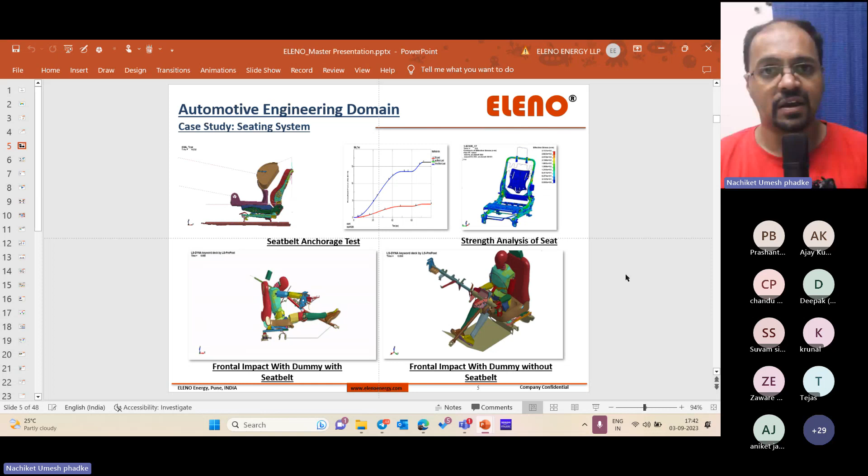So we will try and understand various applications of CAE and LS-DYNA. This is a seating system application, which is an extremely exciting domain. We have almost 8 different organizations where we are vendors for the seating system domain.

This is a regulatory study which is mandatory for anyone manufacturing seats. There can be dynamic tests, static or quasi-static tests. Some of these tests are listed here: there's a seat belt anchorage test, frontal impact with dummy with seat belt, and frontal impact with dummy without seat belt.

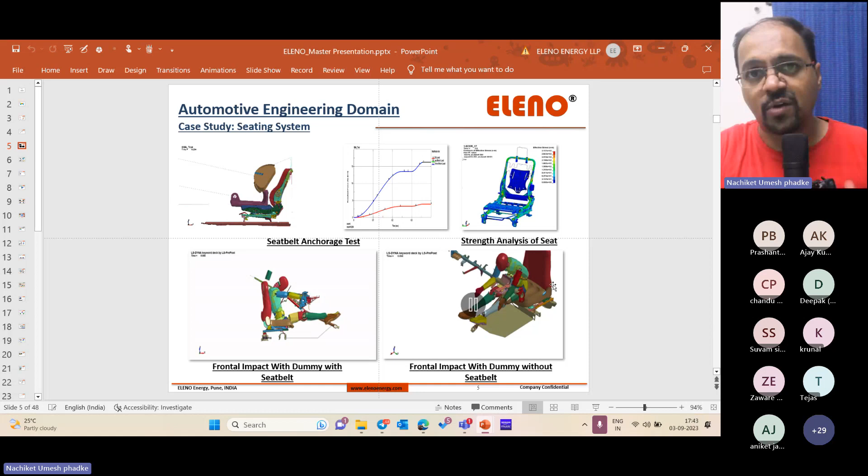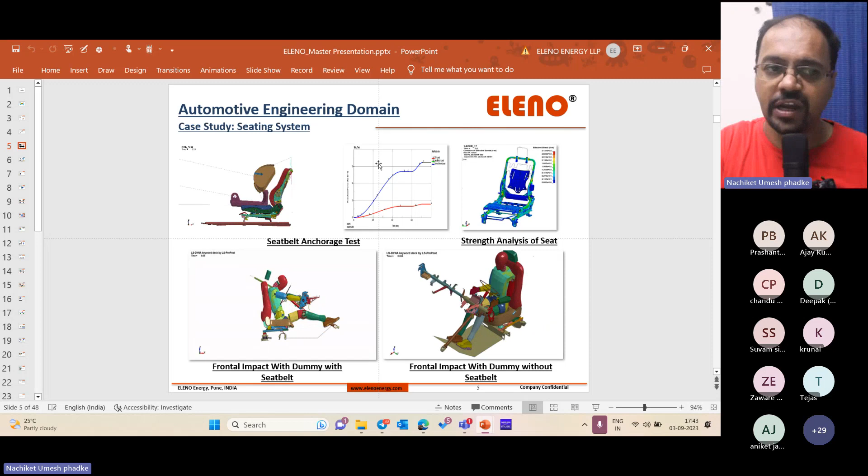These kinds of comparisons we typically do for various steering column or steering system manufacturers, or for full-scale integration of a subsystem into a system level. That is something we keep on carrying out. So this is an automotive domain which we take care of.

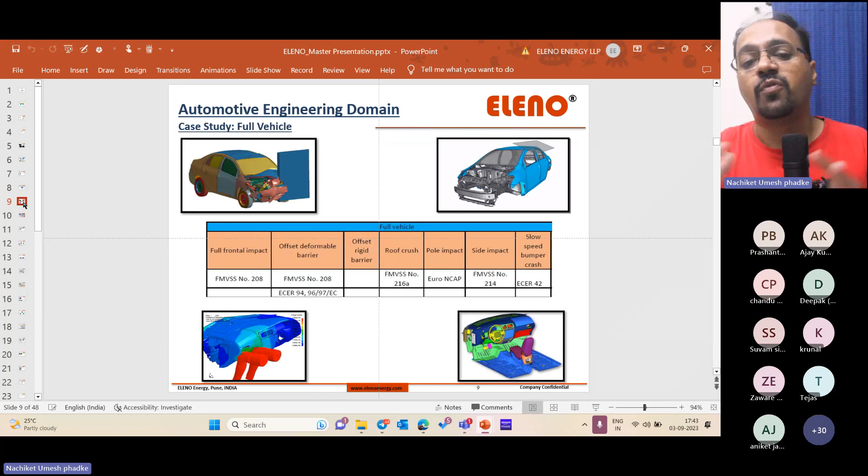Then we have various defense related activities which we do, or which can be done, in LS-DYNA. The biggest part I just want to showcase is how the simulations look when there is a 20 kilometer per hour crash for a non-occupant related domain.

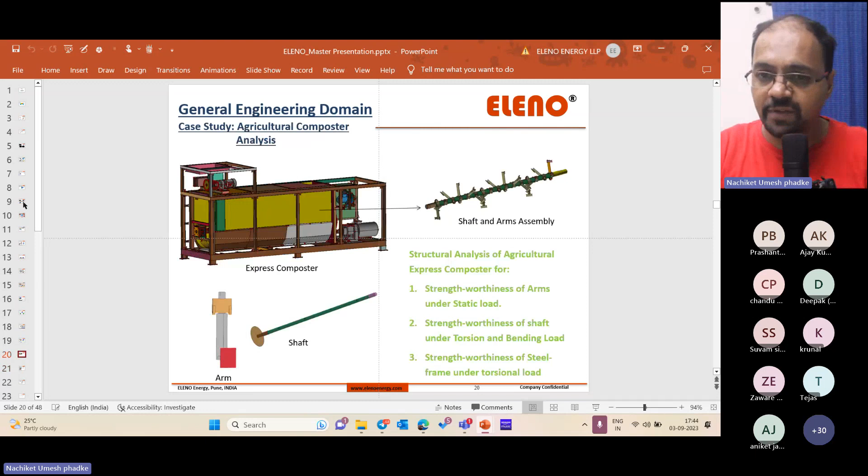Bus domain is a very big domain for LS-DYNA. Then we have commercial vehicles for seating systems, various defense equipment, and various general engineering things we do. This is an elaborate defense presentation for explosion and blast. This is our regular activity.

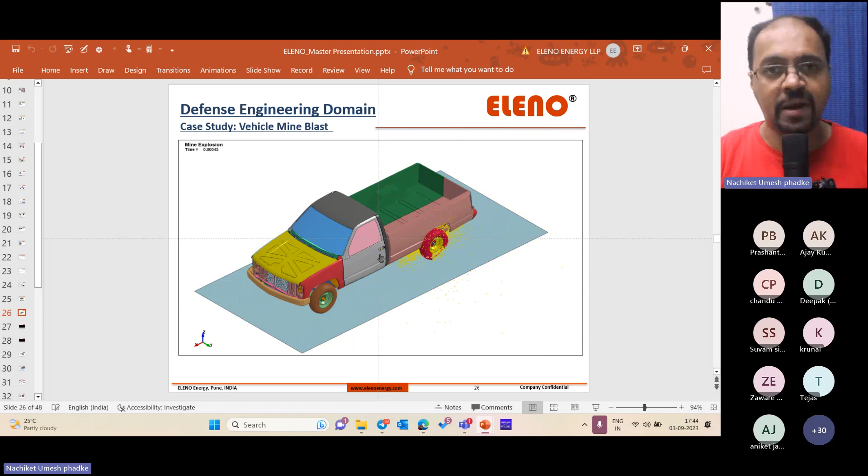Whatever images or simulations you see right now are 100% copyright free. What do I mean by that? These are not data points from the customer side. They are freely available models on the LS-DYNA website, or free CAD models from GrabCAD, so there is no copyright infringement even if I upload this video on YouTube. So these are some of the open source models, you can call them.

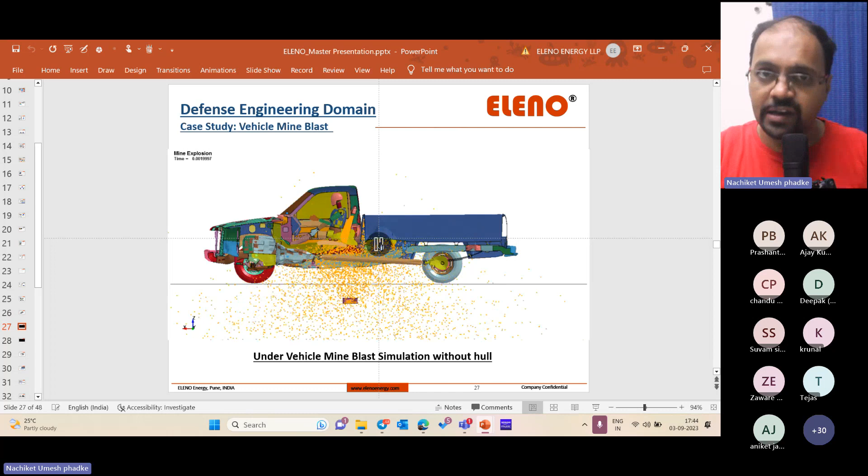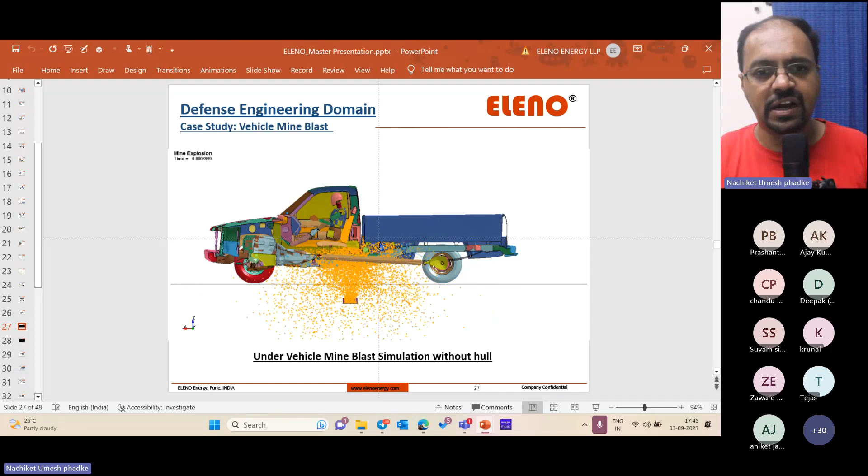So this is a full vehicle mine blast without an underbelly hull. What happens to the dummy? What is the thorax criteria, thorax injury? How exactly is the head acceleration, the chest acceleration? All these things we try to measure using the explicit dynamic simulation domain.

Now you can actually see the timestamp here. If you observe closely, this is time in seconds. So it's 0.001 or maybe maximum 0.002, which is 2 milliseconds.

We are having a 5 kilogram explosive getting blasted off, and 5 kilogram TNT is a huge amount for a small vehicle like this. It is releasing all of its energy in 2 milliseconds. It may look like it's running for 4-5 seconds, but that's due to the frame rate which I have dropped.

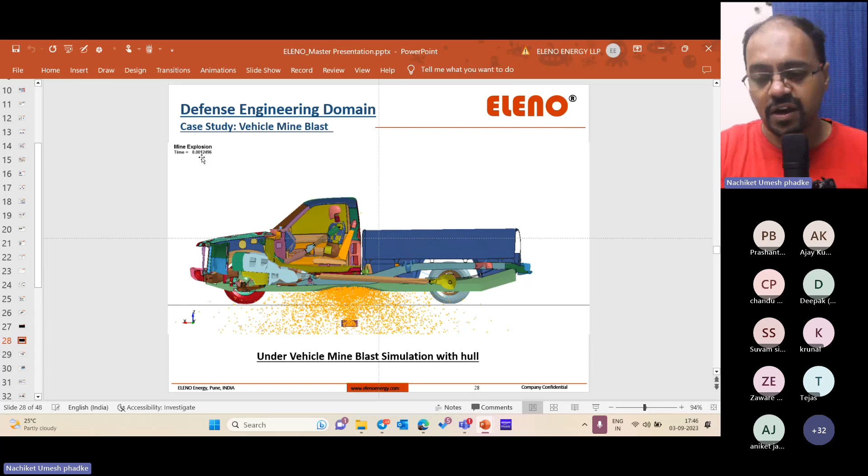So this is something which is extremely important for an analyst or a CAE analyst, to make sure you are suggesting a good output to the customer, or any kind of simulation solution you want to propose there.

This is again a supersonic penetrator in the bunker. The bunker width is 2 meters. It's a defense bunker, and it is supposed to penetrate and go inside the bunker and then blast. So it's like a spice bomb.

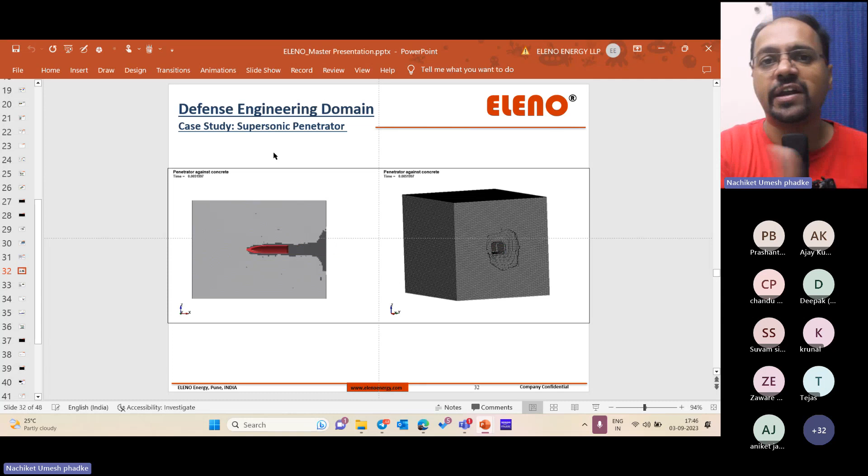We worked closely with various defense industry and defense research establishments to make sure we are very close to the actual results. The trials are still going on. But as I said, this is a representative image, nothing to be worried about if you want to showcase this to anyone.

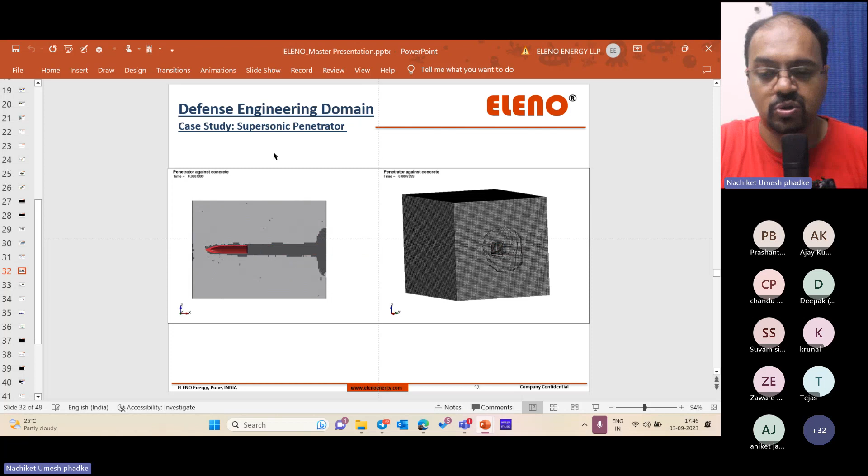Then we have various material characterization which can be done using LS-DYNA. So there will be full vehicle simulation, full vehicle crash simulation, and the material changes its original properties, or behaves differently, when it is loaded in a different strain rate environment.

So the strain rate effect is supposed to be calculated, and we do a split Hopkinson pressure bar test, called SHPB. It's a standard procedure to evaluate at what strain rate the material is going to behave in a certain way. Accordingly, LS-DYNA chooses the strain rate based on the amount of loading or the rate of loading as it changes.

Okay, so that's what we do. This is an interesting case where we have a soil model using SPH particles, which is called smoothed particle hydrodynamics. It's a procedure in LS-DYNA to model a meshless part.

The soil is modeled, and these hammers rotate and clear the mines. Their main purpose is to keep rotating in front of an army battle tank. Whenever a hammer impacts a mine, it gets blasted off, and that blast is contained just behind this thick steel sheet, leaving a clear path for other vehicles since there will be no mines left.

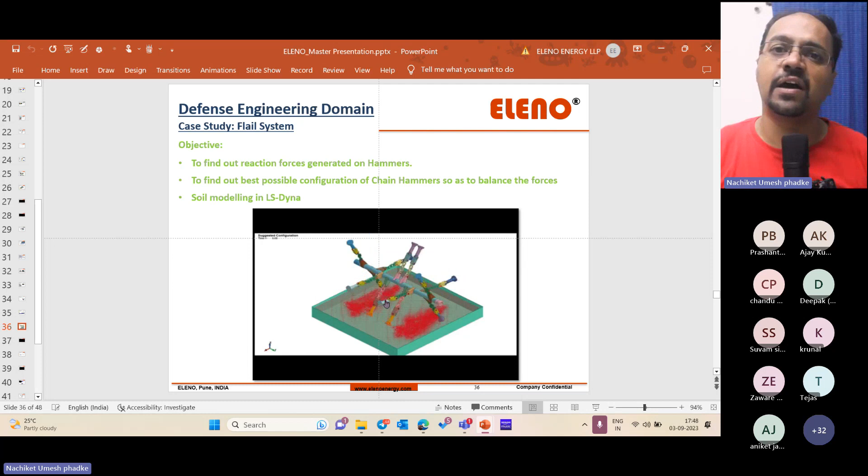These hammers are typically 30 kilograms each, rotating at 300 rpm, and moving at a linear velocity of 4 kilometers per hour. So you have a complex scenario with linear movement, rotary movement, soil, and obstruction. Two hammers touch at a time, creating different forces on the shaft, so there has to be correct bearing selection since the entire load gets passed onto the bearing. This is an example of what can be done using LS-DYNA in an explicit dynamic domain.

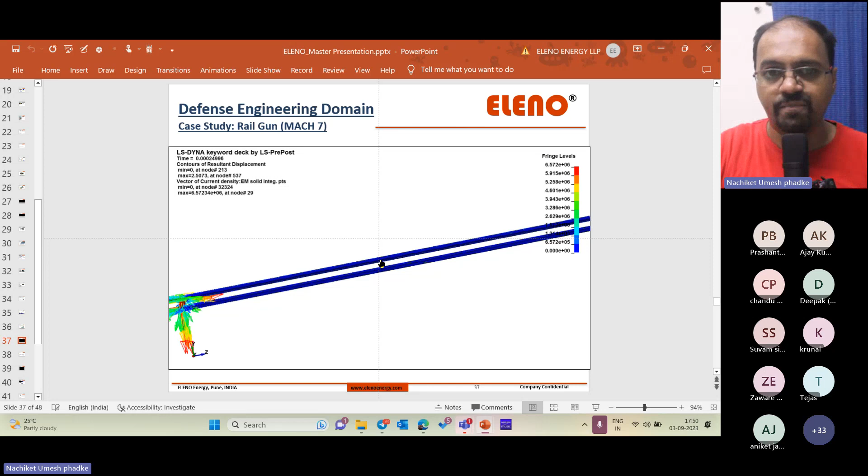We are supplying 10 megajoules of current in less than 7 milliseconds, doing a fast discharge between two rails. The projectile, tightly fit between the rails, gets accelerated due to the fast discharge of current. This is called the Lorentz force. There's a principle behind it, and we can simulate this using explicit dynamic analysis in LS-DYNA.

Composites are extremely important for any organization, especially military or defense, because composites don't rust. They have dimensional stability and don't really react much to the environment - not just rusting, but things like electromagnetic shielding too. So composites are well suited for the defense industry.

They are not for mass production, but for batch production. So we converted this multi-barrel rocket launcher's steel tubes and tried to analyze what happens if we convert those steel tubes into composite tubes. That's called Pinaca, and that's what we do.

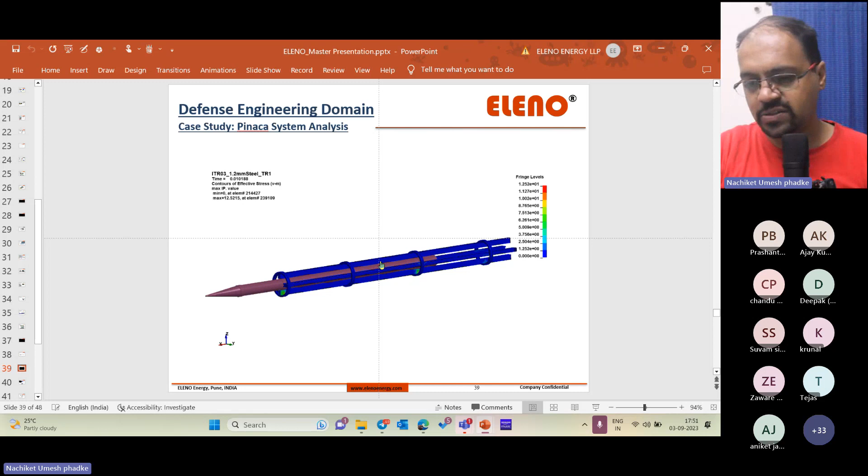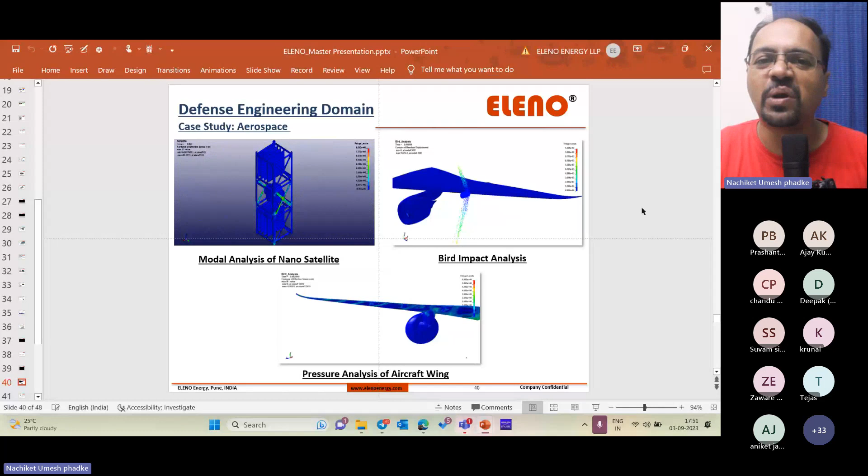This is a bird strike. Again, as I said, all these images are copyright free - we purposefully converted them into a different format. So you may see them as very rudimentary or academic, but we actually worked on a very detailed model; this is just a showcase.

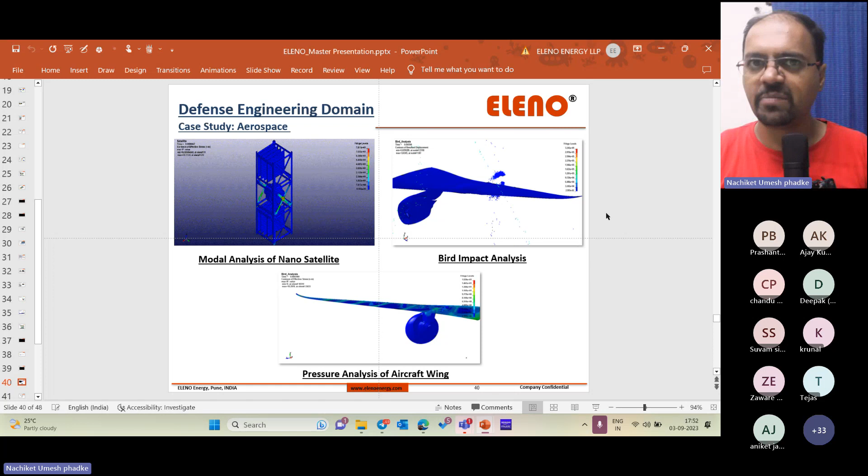You can see the bird is also modeled using SPH material, and we tried to simulate what happens if a bird strikes a wing, or what happens if it goes inside the engine. There will be a blade containment analysis, which every single rotary engine manufacturer follows using LS-DYNA. There are wide applications of LS-DYNA in the aero industry, especially with bird strikes and blade containment - these two studies are very much done across the industry.

We have all types of stackers, we have dock levelers - this is more on the material handling side. And this is what LS-DYNA can do.

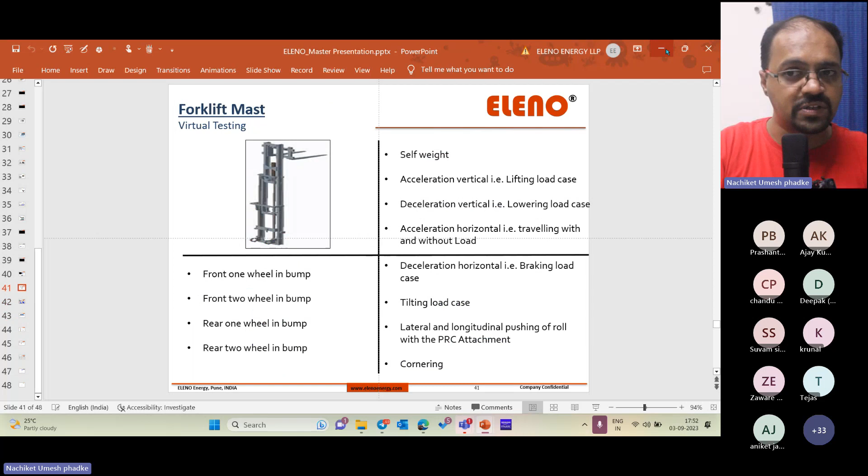Now, there are a few more things which LS-DYNA can do. I'll just try and get one of the presentations if it's available, related to defense - I want to show you some security barriers, what can be done with security barriers.

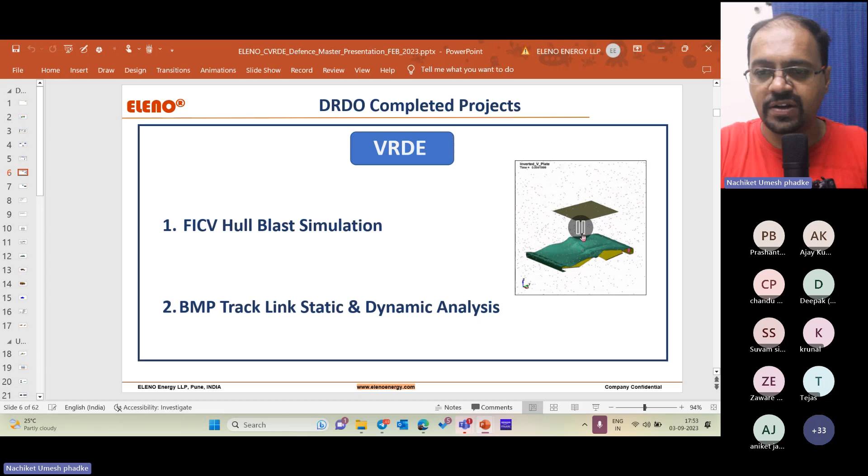So this is one example of a V-shape hull blast. It's kind of real time. What happens with a 10 kilogram blast? That's something which we can study here. I'll show you some of the animation.

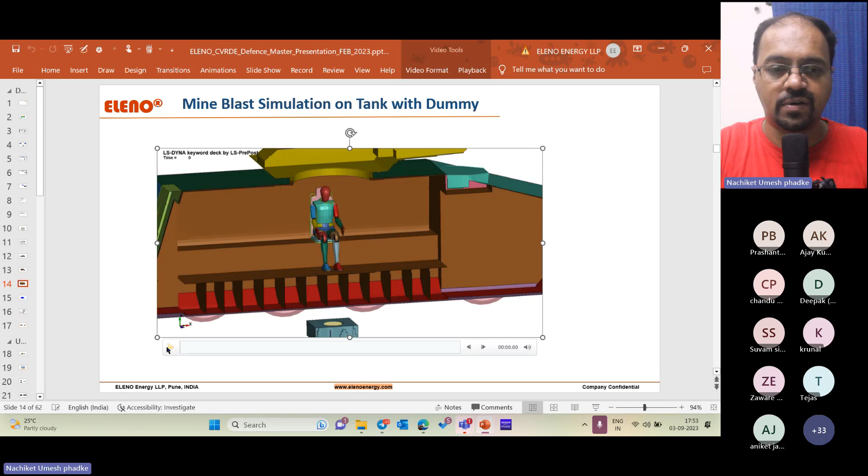This is with regards to what is called a mine protected vehicle. It has a pure V-shape hull. Right now what you see is a dummy or toy tank, as I said, I don't want to infringe any copyright. So these are not going to be flat underbelly, it is going to be a V-shape underbelly. And what happens to the occupant? How is the injury? What is the G value in head, thorax or chest, or hip, that is H point. All these injury criteria we try to understand.

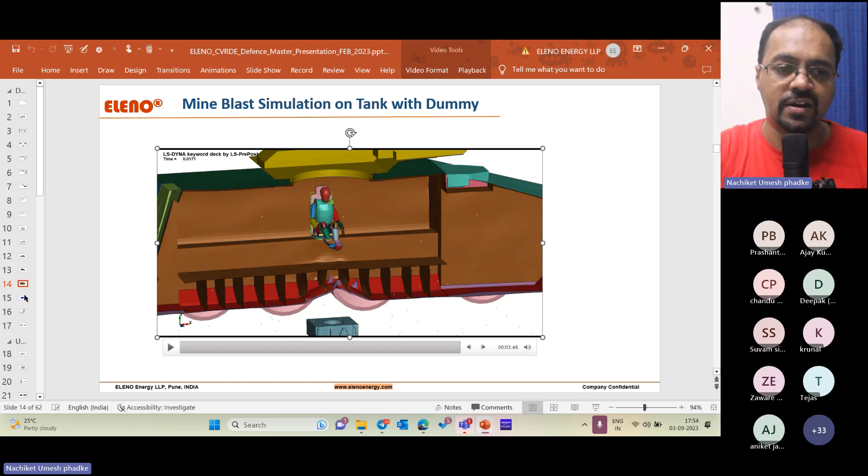You can actually see this. This is a toy vehicle which we downloaded from GrabCAD for showcase purposes. And what happens to the tank? How exactly is it going to get lifted up?

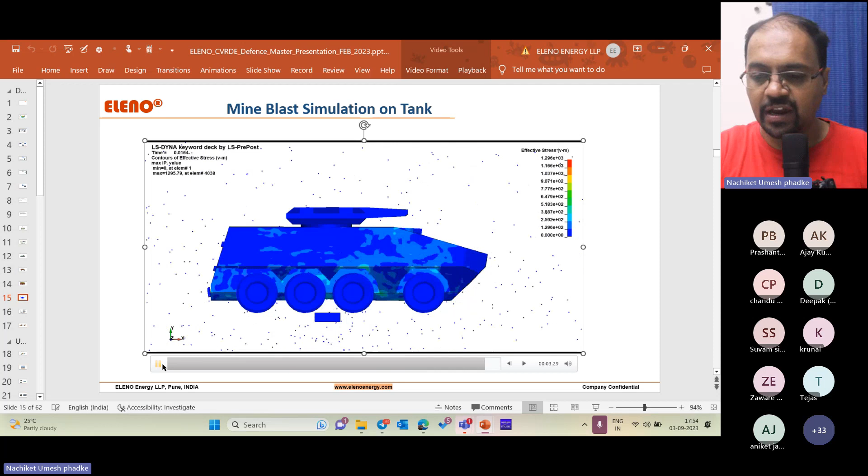This kinetic energy needs to get converted into permanent deformation of the gate. So the main aim is not to survive or keep an occupant alive. The main aim is to not allow any vehicle to pass through this particular gate point.

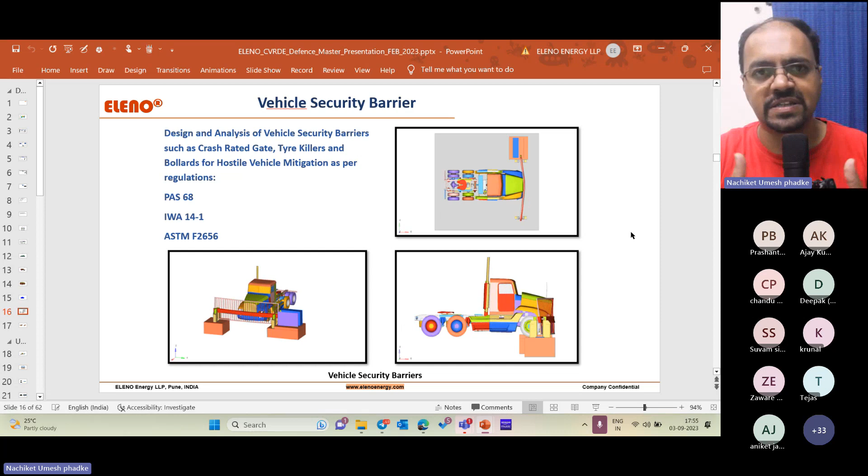So it can be used for thermal or nuclear power plants or high security areas, embassies. Whatever embassies you go to, maybe in your state capital or national capital, if you see a large sliding gate, it has a width of 4 meters opening, which is standard. And if you see that gate, it is supposed to be a crash rated gate. It is rated, it is tested, it's not just a piece of steel sliding around. There will be a lot of things inside.

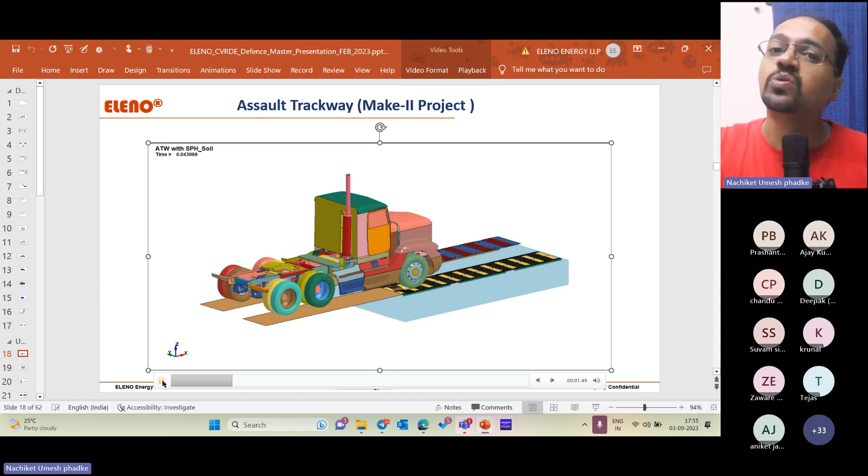So this is one of the assault trackway examples. Again, it uses LS-DYNA for soil modeling. Whatever you see, the light blue part, it is all SPH, it is all soil. Because of this soil characteristic, you can actually see ruts getting formed once the vehicle moves on loose soil. This is an army related project, but this is our own project.

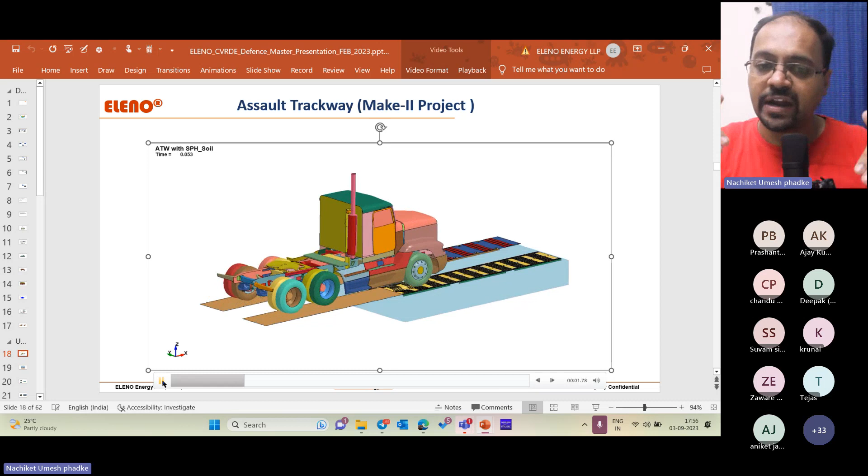So the design is our own, the manufacturing is from Eleno's side, and that's why you can see the real time movement of a truck. The wheel rotates, it moves at 40 kilometers per hour, and it creates a rut. You can actually see the ruts getting created, and we have to do some 10,000 passes. So this is how LS-DYNA will be useful for real time product development.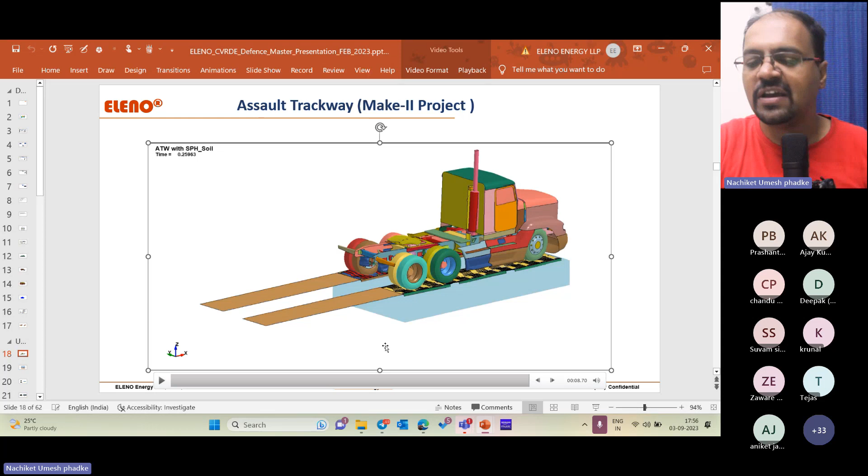The prototype cost will be around 20-30 lakh rupees, maybe 20 lakh is 2 million rupees. That's something which is too much cost for a physical prototype. The CAE test will not cost that much, it will be a fraction of that cost. You may understand that. So this is something which can be done using LS-DYNA.

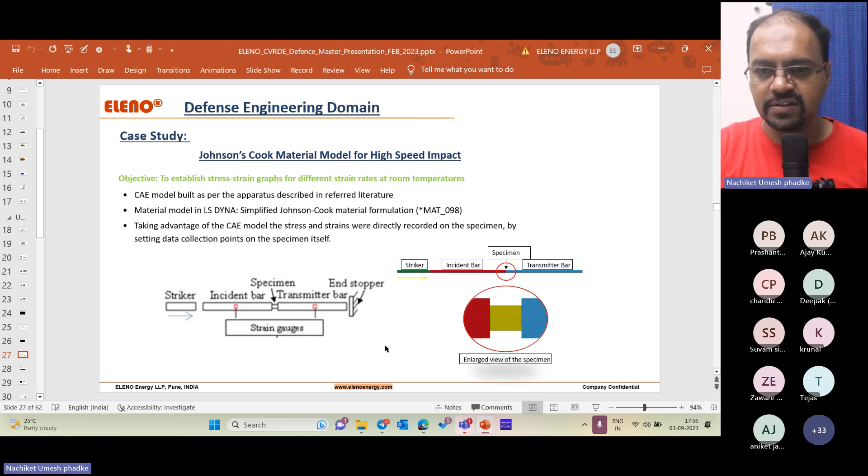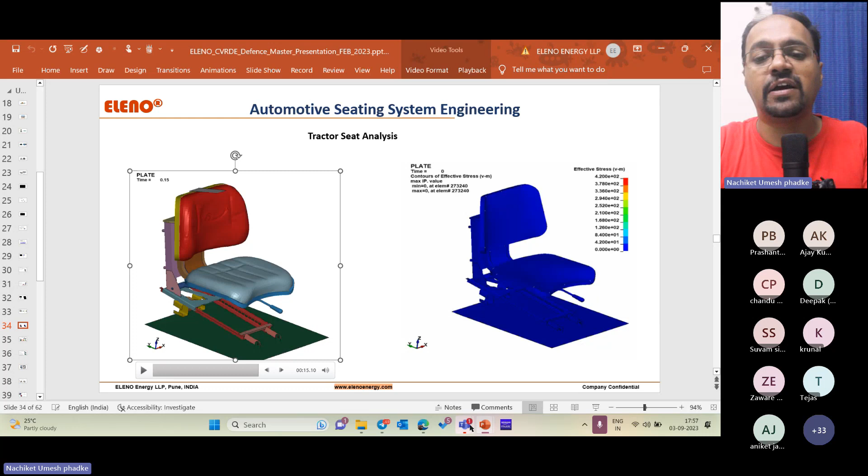These simulations or animations that you saw are with real-time material data which is being fed. We are going to talk about it in detail. We'll make sure we go through the next 30 minutes with the point by point description which I created earlier, and then we will make sure your questions will also be answered. Interesting?

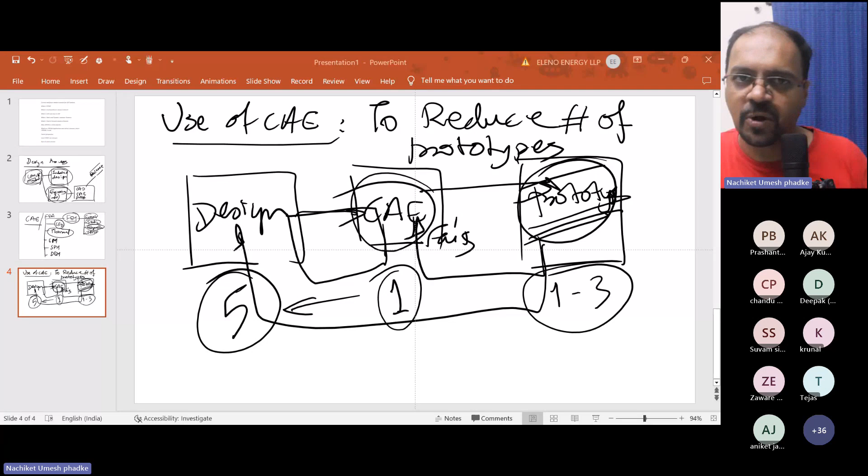We are not developing software, we are developing something physical, which is going to be in mass production. It can be a car, it can be a toy, it can be a white good like a refrigerator or an air conditioner or a washing machine. It can be general equipment, defense equipment, railways, seats inside a car - so it can be a varied kind of spectrum which is going to be there.

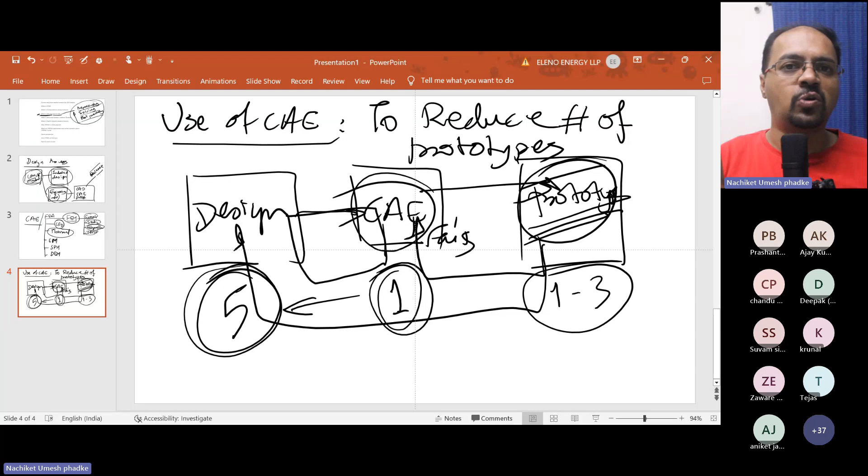Okay, why I try to boil it down like this: for 5 design engineers, you have just one opening of a CAE guy or CAE engineer. Getting my point? So the jobs are going to be hard to find, but how is your journey going to be once you get a job?

For the first 2 years, let's say this is your salary. Year 1, year 2, 3, 4, 5, 6, 7 - we'll just talk about 7 years. So for the first year, the salary will be like this. There will be 10% increment, then another 10% increment. And we will have a parallel graph of knowledge, so if I change the color, we will have a parallel graph of knowledge here.

So you will have this number of years, and the knowledge graph is red. So you have this salary graph and you have the knowledge graph. In the knowledge graph, you will be learning super fast.

In the first 2 years, everything is new to you. You are acquiring skill with regards to software, with regards to interpersonal relations, with regards to the product. There will be many skills, many knowledge-based points which you are going to acquire in the first 1, 2, or 3 years.

Then it's going to ramp up like this, but your salary is going to ramp up like this. So I will change it again back to the black one - that's your salary part. Is this making sense, guys?

Because you may be doing a switch here, you may be doing a switch here, and you are going to have a salary hike. But in the core mechanical engineering domain, expecting a huge salary at the beginning is not going to happen.

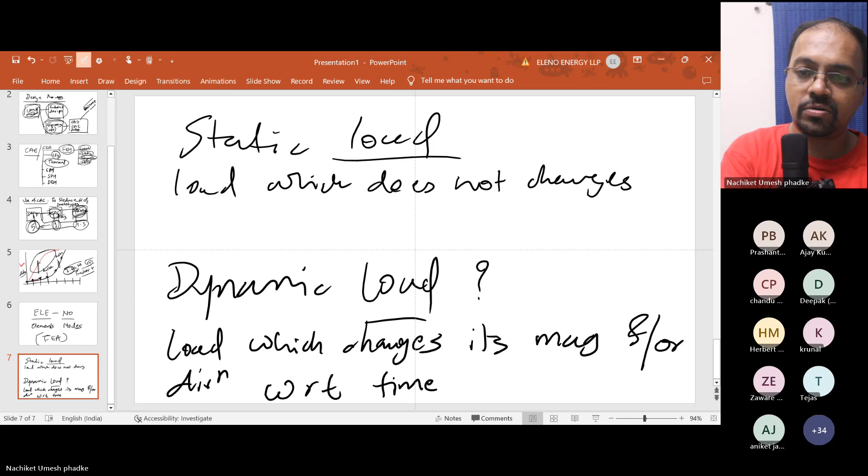And a similar one will be a load which does not change its magnitude and or direction with respect to time is going to be a static load. Okay, so you have these two important definitions, static load and dynamic load.

Now, there is something which needs to be discussed further. You have understood what is a dynamic load, a load which changes its magnitude and or direction with respect to time. But there is...

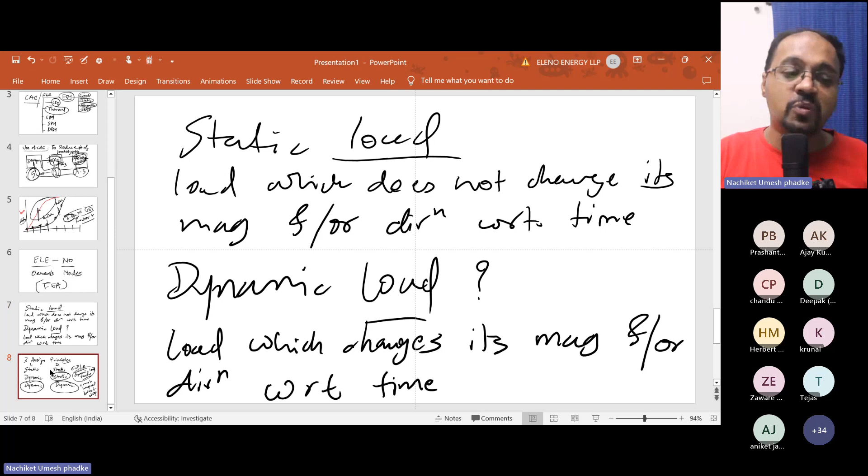And then you are supposed to go to the design principle. Even if load is static, even if load is dynamic, what is it that I'm going to imply? Am I going to use the static design principle or am I going to use the dynamic design principle? Once you have understood this, you have a better understanding of which software to choose.

So we'll come to this explicit dynamic part now. Now you have numerical methods. Let's come to what is implicit and explicit. So you have numerical methods, there are two types of numerical methods.

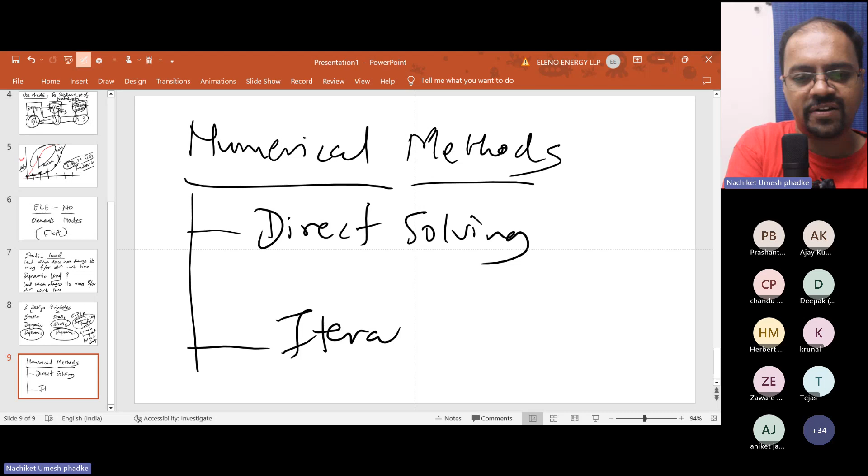So there are two types of numerical methods. One is a direct solving method, and there is an iterative method. In iterative method, you search for one solution. You have bisection method, Runge Kutta, Newton-Raphson - all these come under iterative.

You do iterate. If you are not converging, or your error percentage is not reducing, what do you call it? You call it diverging - the solution is diverging. If you have something where the error percentage is reducing and it stops reducing to an extent that it gives you the same number, you call that solution converging.

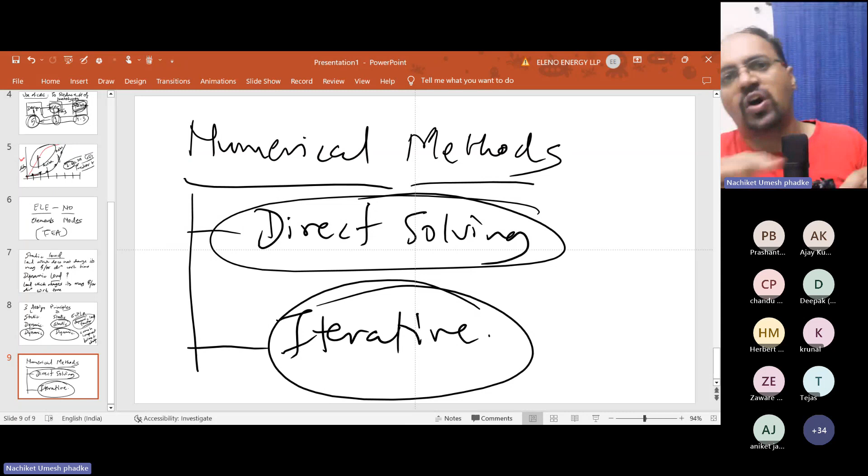So you have direct solving method where you are not looking for one solution. You are looking for a progressive solution where you will have different output at each time interval or X value. So what happens when we put it in graph format - the direct solving method will have abscissa, that is the x-axis.

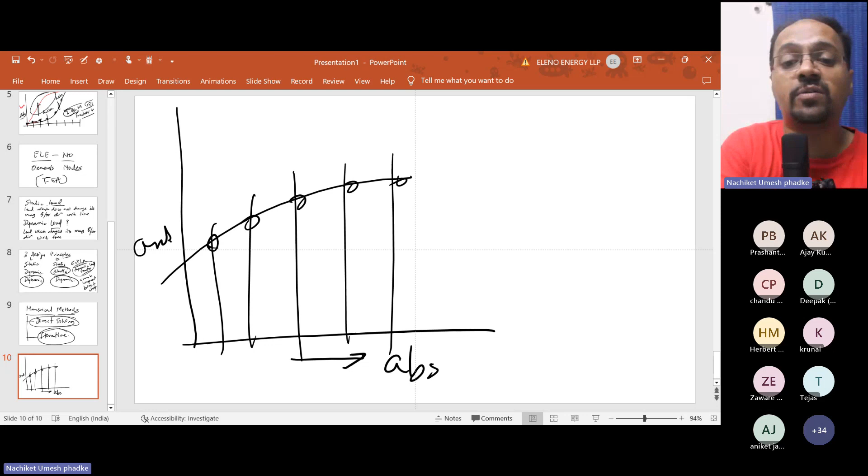So you have abscissa and ordinate, and you will have a solution for a particular input, and it is progressive. It's not one solution - you will have solution at each interval, whatever interval you have proposed, and that interval is called least count.

Because this direct solving method can be central difference method or Taylor series - all are derivatives of Taylor series, which is an infinite series to solve a problem. So when you have this interval, at a predefined particular value, that value is called least count. And you will have solution at each least count value in a progressive manner until you terminate the simulation or cycle.

So what is it that progresses and has no human control? It is time, correct? You cannot come back in time. So this is a progressive solution, whereas when you come to the iterative solution, it's not always progressive.

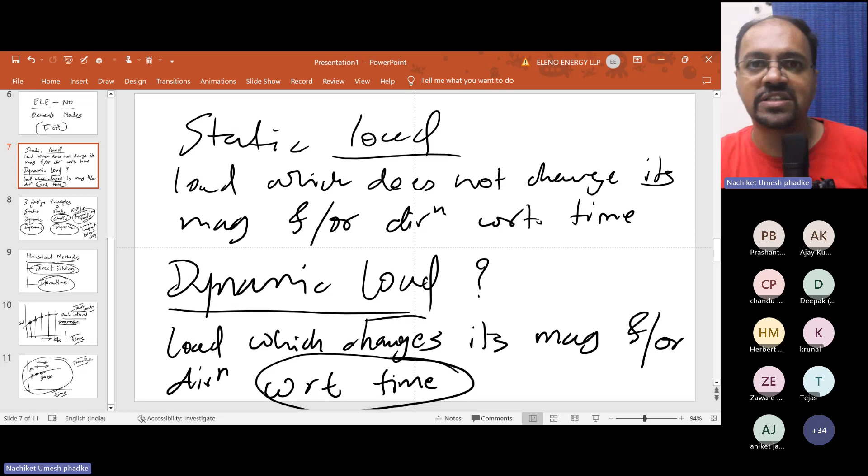And what is the definition of dynamic load, guys? With respect to time, correct? So if your load changes with respect to time, you cannot use an iterative method for solving a time problem.

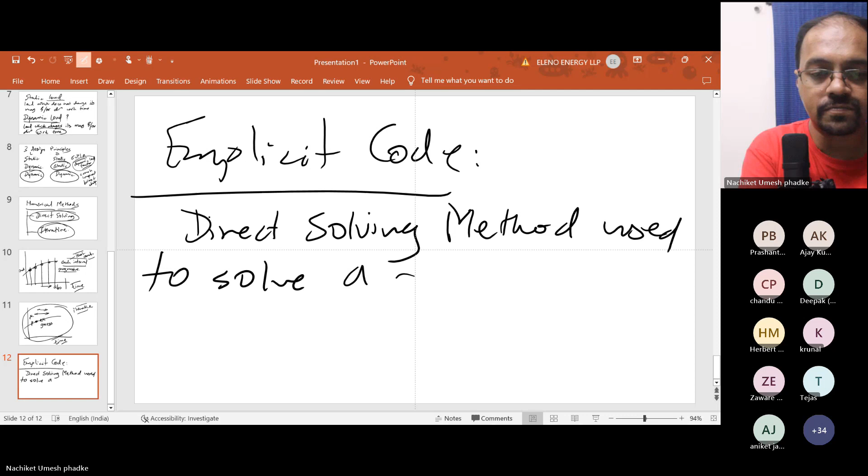So what is the definition of explicit and implicit? Direct solving method - okay, direct solving method used to solve a dynamic load problem is called explicit code.

Making sense? Nobody is going to teach you this, I guarantee, to this core. So what is explicit code? Direct solving method, that is a numerical method used to solve a dynamic load problem - you call it explicit code.

Then what is the next thing? Implicit code - you just have to replace the words. What is it? Iterative method used to solve a static load problem - you call it implicit code.

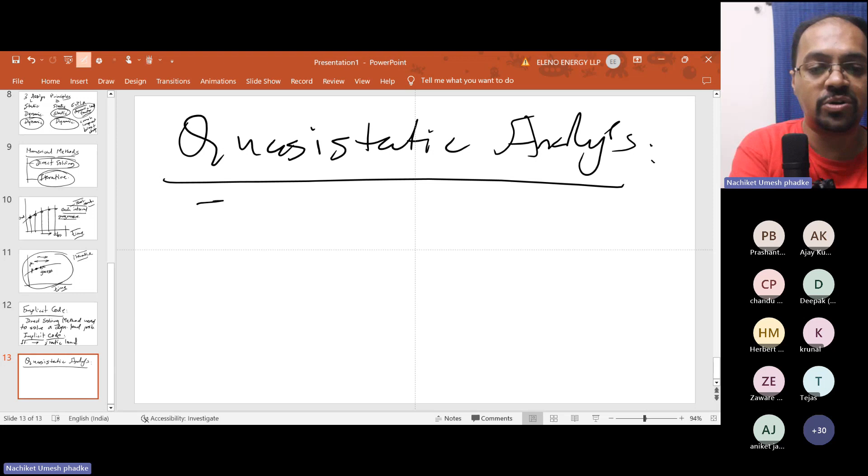Now there is one more definition typically asked in interviews, called quasi-static analysis. So what is quasi-static analysis? Quasi-static analysis is not a method - it is a type of analysis which uses explicit code for static problems.

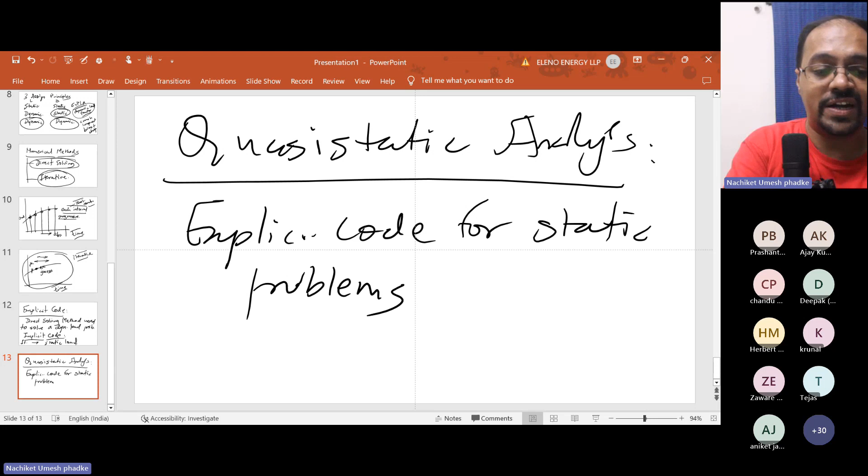Understand this clearly: when you use explicit code for static problems, you call it quasi-static analysis. There are problems with large deformations. You may have a steel ruler, and if you keep applying load while still within the elastic limit, the ruler is going to come back, but it may have a huge deformation that is sometimes not solvable using implicit code. So what do we do? We use explicit code to solve a static problem.

And what is a static problem? When kinetic energy equals zero, you call it a quasi-static analysis. Because what is kinetic energy? Half mv squared, where v is a time component. Velocity is a time component. So if velocity, meaning kinetic energy, equals zero, you call it a quasi-static analysis.

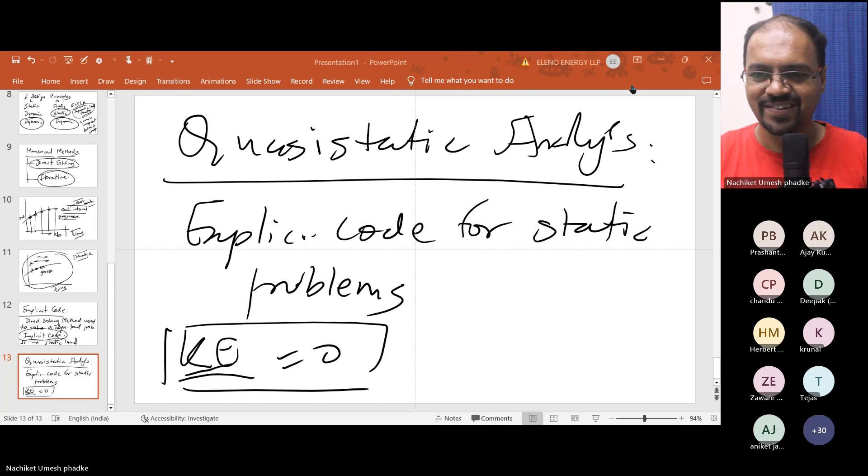Understood, interesting, okay. It is still relevant, guys. There are people who are mistreating mechanical engineering, people who don't have belief in mechanical engineering, people who don't really understand what mechanical engineering is. That's why you hear these jargons that there are no jobs in mechanical, there's no growth, why would people work on lower salaries after 5 or 6 years of their career. That's never going to happen.

Okay, good, perfect. So I hope I covered this explicit-implicit part in a better manner for you guys. Going back to the list we discussed at the initial stage, we covered what is explicit dynamic analysis, and now we have an answer: why is LS-DYNA so popular?

It has a huge material library. It is extremely flexible, not like ANSYS. This particular explicit dynamic solver has everything which can be controlled by the user. You can control material, database cards, control cards, contacts, and how exactly spot welds behave. Everything you can control as a user.

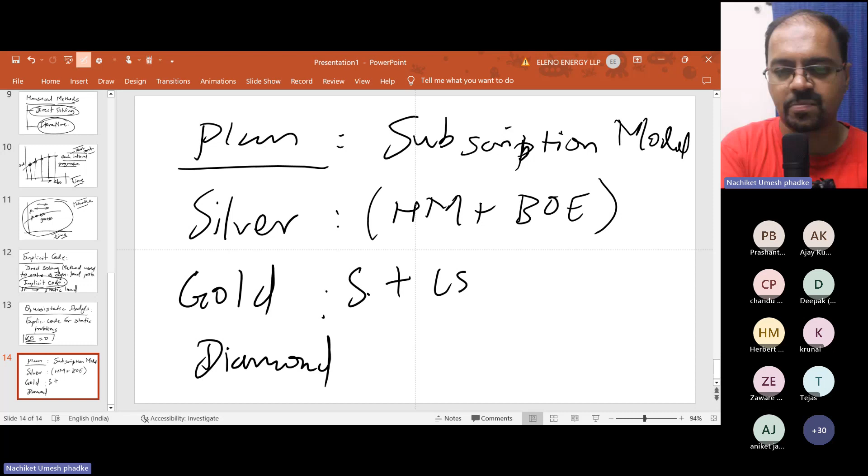You have a gold membership, which is silver plus LS-DYNA. And there is an important aspect here, which is placement assistance.

When I say placement assistance, it is till you get placed. There are no caps, no questions, no reasoning. You are supposed to be with me, I will be your mentor, I will handhold you, I will make sure you are getting placed. Until you are getting placed, there can be failures. It's perfectly fine, we are all humans. So there can be 1 or 2 failures, and on the third time you are going to get placed. That's my responsibility. So we are going to have an assistance, not an assurance — assurance is a fraud. I'm not assuring anything because many factors may go wrong. But in a human manner, we are going to correct ourselves and make sure we are job ready. Making sense? So it's going to be placement assistance.

What is diamond? Diamond is entire gold, including placement assistance, plus there is going to be an entire product domain. So we are going to talk about product. In LS-DYNA, what we are going to cover is 10 different problems of different varieties. It's all explained in a PDF that I'll discuss later.

So this LS-DYNA consists of 10 projects. First 4 projects are single part projects, so there will be no assembly, nothing — it's single part. These first maybe 4 projects are to give you an idea how LS-DYNA works. The next 6 projects are going to be extremely challenging, what you can say — they will be industrial projects.

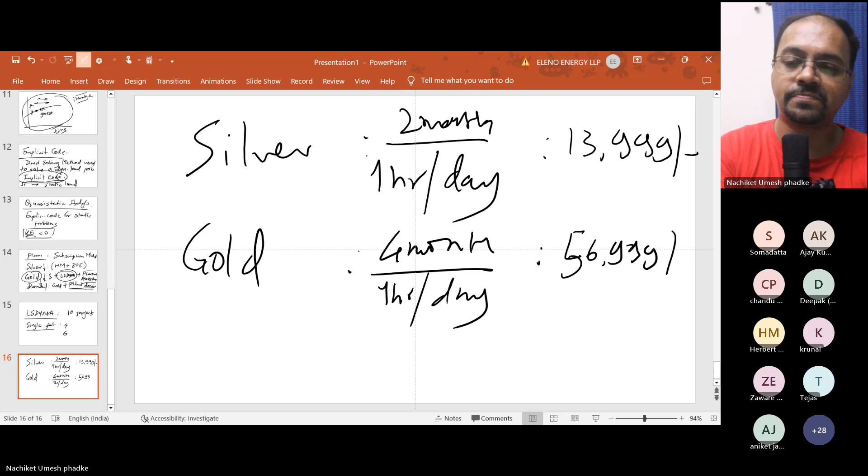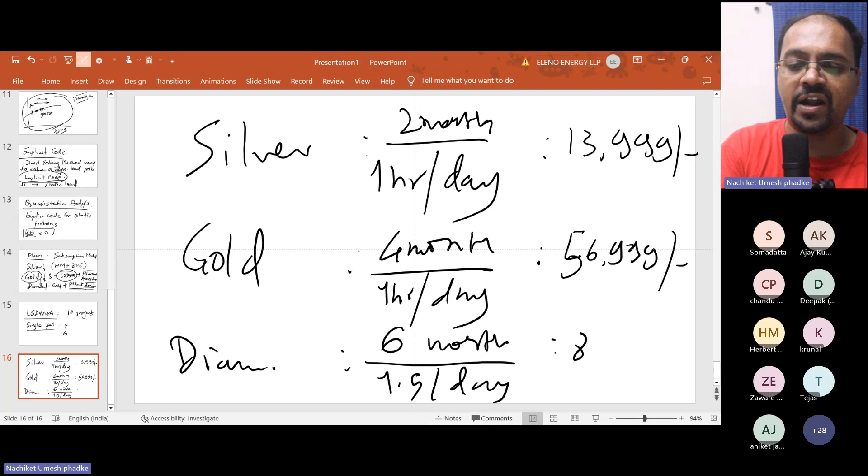And we have the diamond program, or diamond membership, which is going to be a 6 to 7 month program. We are expecting 1.5 hours per day — higher engagement — and it is 88,999. Okay, now how exactly does this work?

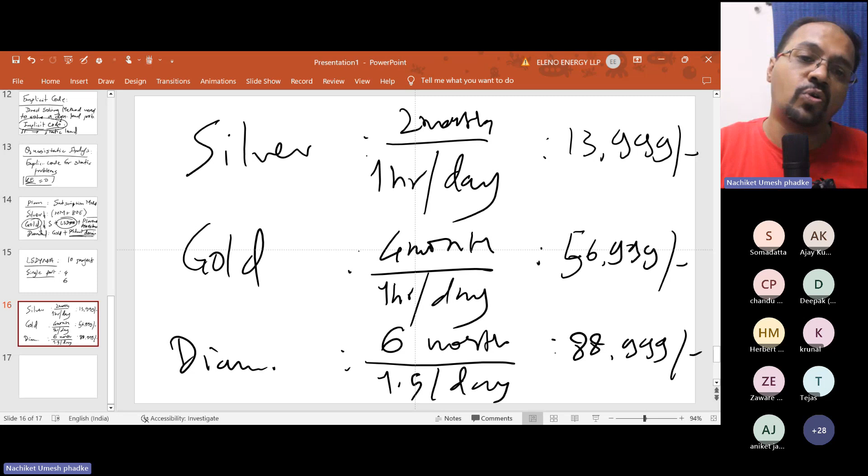All sessions are self-paced. That means if you are able to invest more time, you will finish your course faster. You will have self-paced sessions, and all sessions will be given access to.

Myself, Nachiket Phadke, personally — I'm going to meet you every Wednesday, Saturday, and Sunday in the evening time, maybe 8 p.m. IST. Right now also I'm meeting almost 30 odd people on Wednesday, Saturday, and Sunday live. So this is going to be live, we will share our screens, we will talk about your problem, I will debug your model, I will answer your questions. And it's going to be community learning — why? Because somebody who has a question, you may not have that same question, but you get a new question, a new perspective, and you get an answer as well.

Interesting, right? This is working like a miracle. We are able to generate a lot of employment because of community learning only. And this is super useful for everyone, including myself, because I can understand a spectrum of problem statements from you guys.

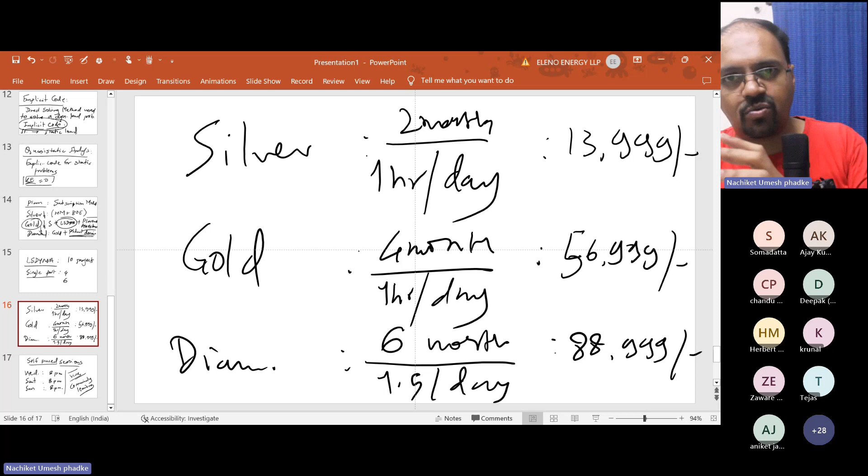So you are not just getting one or two softwares to learn. What you are going to get with this diamond membership: you are getting Hypermesh access, you are getting LS-DYNA access, you are going to learn LS Prepost, which is a pre and post processor for LS-DYNA, and you will be learning HyperView.

You will be learning seating system or interior system or full vehicle based on your choice. You are also going to learn PowerPoint presentation, how exactly to generate the PPT, and Excel for formula, various formula creation. You will be learning soft skills.

You will have soft skill training as well. My camera will restart, okay, it typically stops after some time, it gets heated. But just bear with me.

So you'll have Hypermesh, LS-DYNA, LS Prepost, HyperView, and placement assistance. Last but not the least.

And you can start it any time. If you are ready today, you can start from today. If you are ready from tomorrow, you can start from tomorrow. And the admission process is very simple.

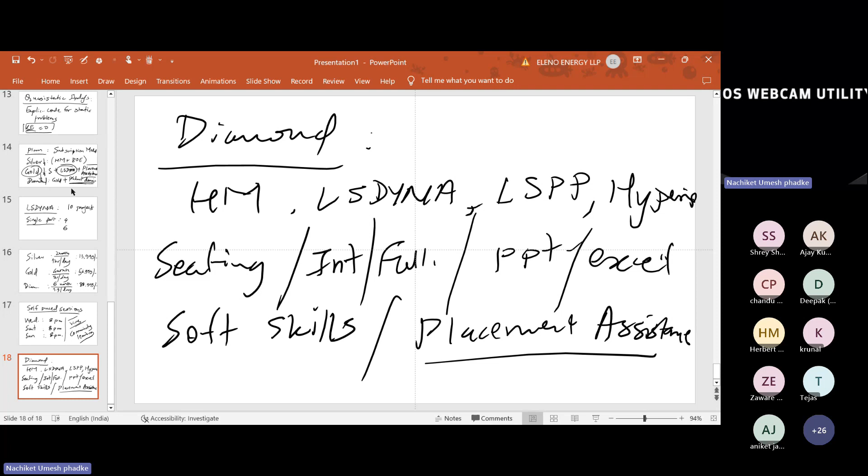So the most value-added course for you guys is this one, because it is at a middle cost but gives you the maximum which is needed for a fresher. Later you can upgrade to diamond if there is some kind of a lacuna, and you can just pay the difference and upgrade yourself. This is something which I have chalked out.

It's working in a fantastic manner. There are people who are getting benefited. There are anonymous people who give me feedback on LinkedIn or Facebook, people who don't want their names disclosed, and people who are meeting me and giving feedback that this helped boost their career.

I trained people from UK, Mexico, USA, all parts of the entire world, wherever I can reach, wherever there is internet. I'm still training people. And that's all from my side.